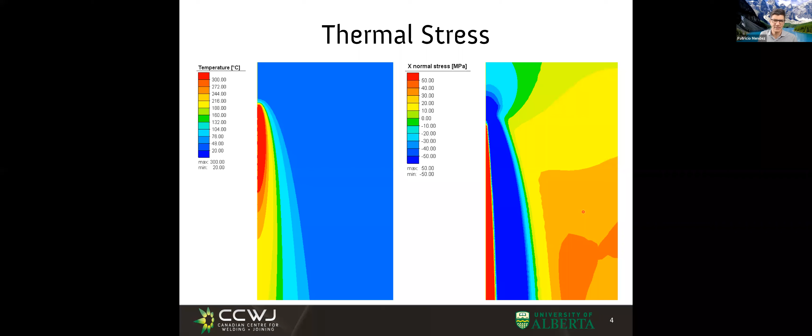So when people talk about welding distortions and welding stresses, we know this: something's getting bent, something's getting out of place. But if we dig a little deeper, we'll see there are many types—people tend to call it shrinkage. It's kind of an odd word because it leads some people to believe shrinkage means shrinkage from solidification, or thermal shrinkage, forgetting that before the thermal shrinkage, there was a thermal expansion when things heated up. But whatever it is, I'm going to use this word shrinkage here for now—we have many types.

Along the axis of the weld, we have longitudinal shrinkage. Across the axis of the weld, we have transverse shrinkage. In addition, if I weld the plates, they tend to be distorted—if I weld two flat plates, typically they don't end up flat. And I showed you some images when we discussed the concept of joining, about how things like electron beam welding could give low distortion in thick sections, but TIG could end up with big angular distortions in thick sections. And then here we have bending shrinkage.

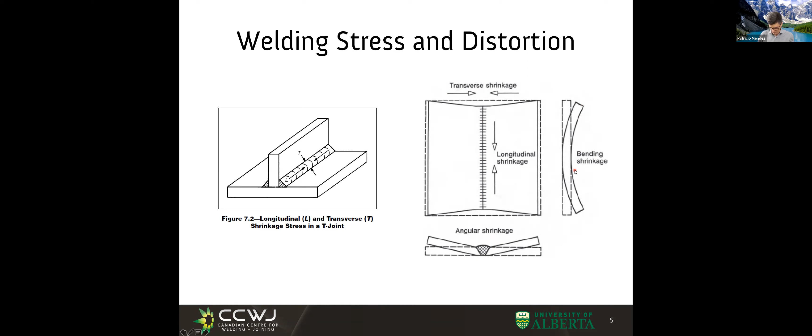So about transverse shrinkage, using words: there is something interesting, as the plate gets locally hot, it expands, and then when it cools down, it shrinks. So if I have no restraints, the plate is going to move out and in as it needs, and we might end up with higher distortions.

On the other hand, we can clamp really well. If you look at the Lincoln Procedure Handbook, it has a whole subsection just on clamping. You clamp it really well, so when it wants to expand or contract, it can't. Good news is it's not going to be too distorted. Bad news is it's going to have a whole lot of stresses accumulated, right? So that's about transverse shrinkage.

About angular shrinkage, we have a very similar effect, and that's one of the reasons we clamp things really tightly. But it's never perfect, never perfect. And multi-pass welds bring even more complexity - in this class we'll be talking about single pass welds. For example, when I make my root pass, now things cannot compress anymore along that line.

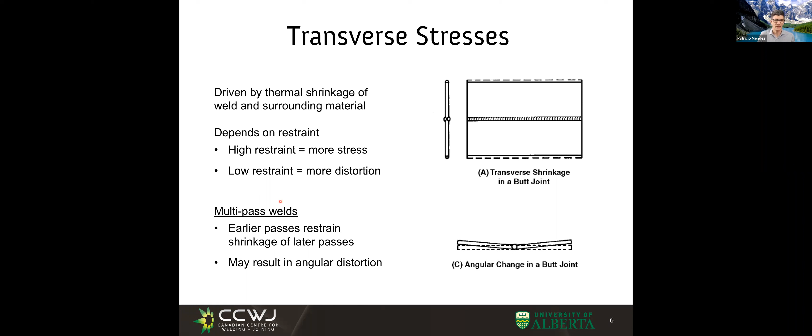All these are words. We're working on turning those into predictive methodologies for engineering - not quite there yet, and nobody's quite there yet, but we will be. About angular distortion, there are some things that are interesting. Let's compare two welds, one with a V groove and one with a double V groove. As you can imagine, the double V groove is going to end up with less distortion because it's a symmetric joint to start with. Whatever distortion the V does is now compensated on both sides.

A really good question would be: if both V's are the same, why don't I end up with zero distortion then, right? Well, I'll give you an answer in words - we're working on doing this more rigorously, but this is what happens. Let's say I weld it and I flip it, and this part is welded, and it would have a distortion comparable with what is to be expected from a single V.

Now I'm going to do my new weld, but guess what? I'm doing it in a starting condition that is already different than before, and in addition, there might even be some residual stresses involved in some cases. So it's never exactly the same. It's not the same to start with a 60-degree V as if I did the weld on the backside before - chances are that this opening is bigger than 60 degrees. Very interesting. So that's comparing a single V with a double V.

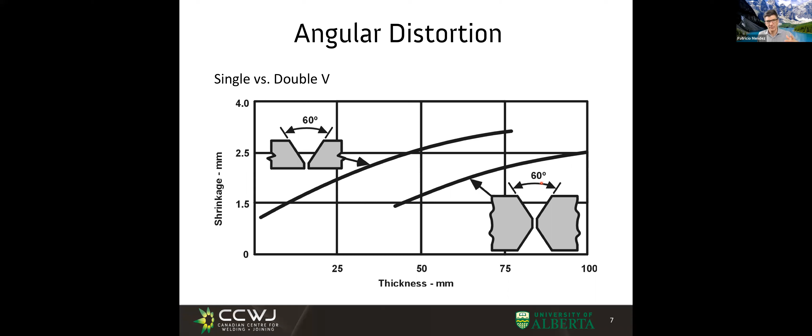Now let's compare with the opening of the V. And guess what? Something not too difficult to imagine: as the V is more and more open, the angular distortion is higher and higher. This vertical axis measures how many millimeters one of the sides lifted for a particular case. I'm not worried about exact numbers, just the trends. The trend is that big open V's have a lot more distortion than narrower V's, and I could reduce it even more by having a double V joint preparation.

When we discussed keyhole electron beam welding or keyhole laser beam welding, that keyhole that goes very deep is essentially like having a very, very narrow joint preparation, like closing this to much less than 60 degrees. If I close that to close to 0 degrees, then I end up with something that has close to zero distortion.

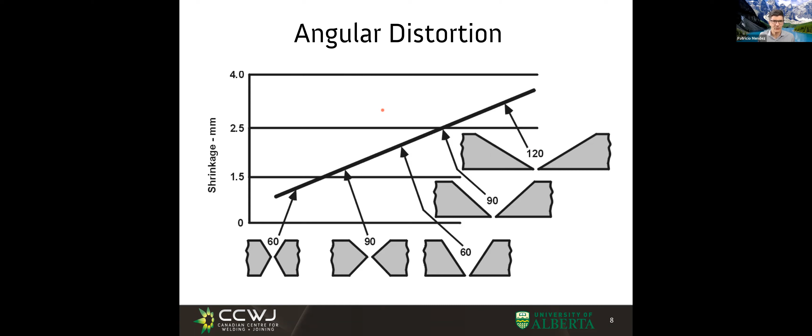If you look at old exams, this is a question I asked in those, pretty much as it is here. They're all uploaded. So let's talk about longitudinal stresses, and longitudinal stresses is where we're gonna get quantitative.

We're gonna see how the area near the weld expands and then shrinks, and when it shrinks ends up with very high tensile stresses. If we weld this plate along this horizontal axis, this is a typical distribution of residual stresses from a book: right near the weld is going to be very high tensile stresses, and outside the weld we're going to have the compressive stresses that balance out the tensile stresses.

Something I want to bring to your attention: until not too long ago, I myself used to think that the part that ended up in tension was just the molten weld bead. Let me dispel that. The weld bead plays close to no role. Whether the weld bead is bigger or smaller, you would have distortions even if you don't melt anything. We're gonna see what matters for real.

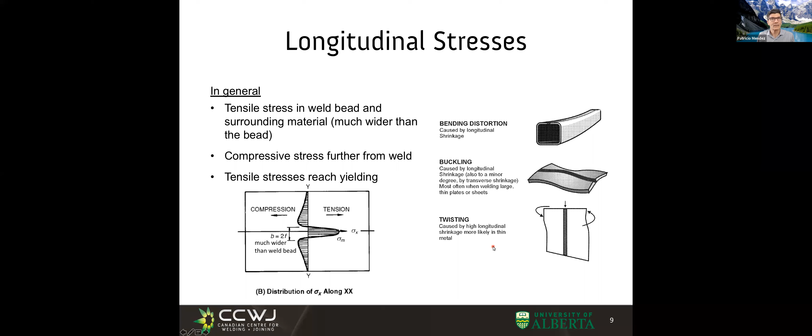So to think about residual stresses and the associated distortions, I'm going to use what is a standard way of looking at the problem that is called the 3-bar model. The 3-bar model is a lie. And typically, I tell you lies and I say, well, but it's a pretty good lie. This is a so-so lie. So I'm going to use the 3-bar model to discuss with you what matters. And then I'm going to tell you where it falls short, and we're going to do it right.

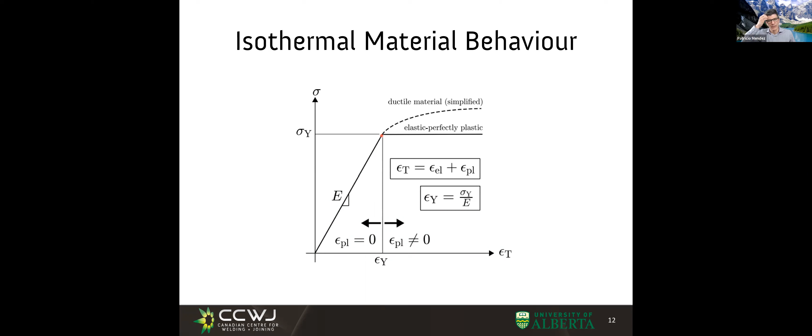So let's go back to the residual stress. Three-bar model: on the sides, the two bars, number 1 and bar number 3, are always at preheat temperature - let's call it room temperature. Bar number 2 in the middle goes hot and then cools down. The material we're going to consider is elastic, perfectly plastic. As we stretch it to a point, the atoms stretch along a line, but then when we let go, it goes back together. And if we stretch it too much, it starts yielding.

In this model, before we apply the load, before the middle bar sees temperature, everything is the same. When the bar starts seeing some temperature, it's going to want to stretch. This stretch is not possible in this case because of the crossbars. In the case of a weld, it's not possible because it's the same plate and all the rest of the plate is cold. So the center cannot stretch - it's all tied together. So the middle material near the bead wants to stretch, but it cannot.

It would be like if it wants to be bigger at no load, but in reality it's the same size, so it gets compressed, and depending on how much it wanted to expand, it can reach yield stress. It doesn't get much more than yield stress. But as it wants to expand more and more, with the same yield stress, it starts having more and more plastic deformation. So here are the curves I was asked about.

At the beginning, the middle bar wants to stretch thermally, and if it stretches only a little bit, it stretches elastically. It gets to a point in which it reaches the elastic limit - the horizontal axis here is the total strain. If it stretches any more, then we start having plastic strain, motion of dislocations. So red is the bar wanting to expand elastically but cannot, so it starts accumulating loads, or elastic strain, in compression. When it reaches the limit, it starts to accumulate plastic strain, and it can keep stretching.

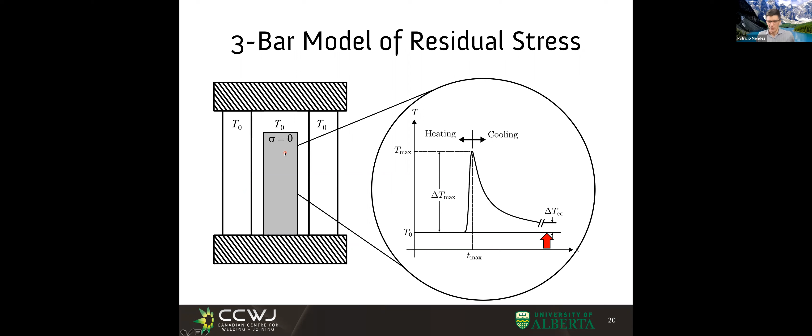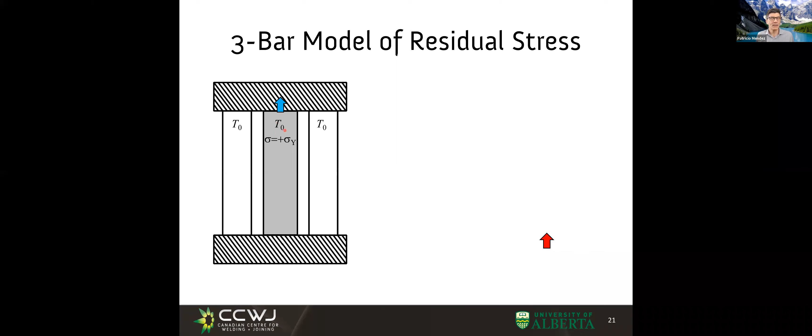After it reaches the peak temperature, it cools down and wants to shrink. If it could, it would get shorter, but it cannot, because it's all attached to the part near the weld - attached to the rest of the plate. So to make it be the same size, we would need to stretch it, and depending on how much we stretch it, it can reach yield again.

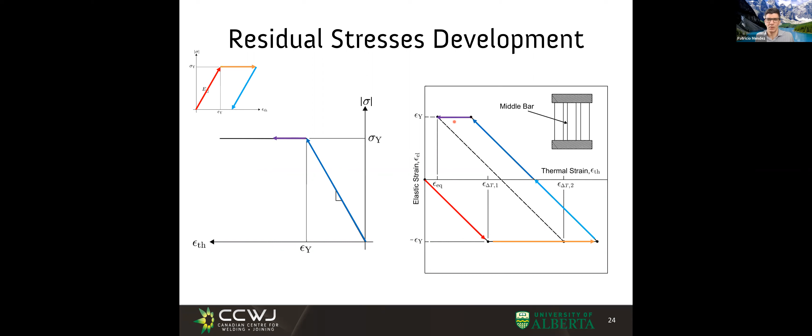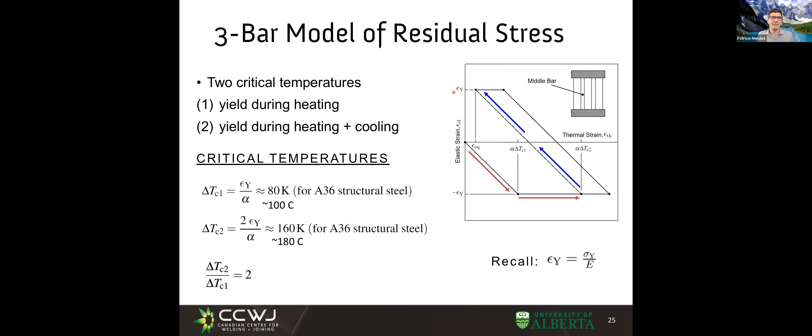What I wanted to bring up is there are two important temperatures. One is during heating, the temperature at which it starts yielding in heating, which we call delta T C1, and this is more or less 100 degrees. So when you're welding, at 100 degrees the material starts to yield. Then there is another one: if you put enough plastic strain during heating, when it cools down, it will eventually reach yielding too. The temperature at which we start having yielding during cooling we call delta T C2, and that is on the order of 180 degrees C. The final stress in this part will be a tensile stress on the order of yield stress.

So in this 3-bar model, what we see is that the amount of plastic strain is related to the total thermal strain, which is related to the thermal expansion coefficient, minus the elastic component. And the elastic component was given by this yield temperature, delta TC1.

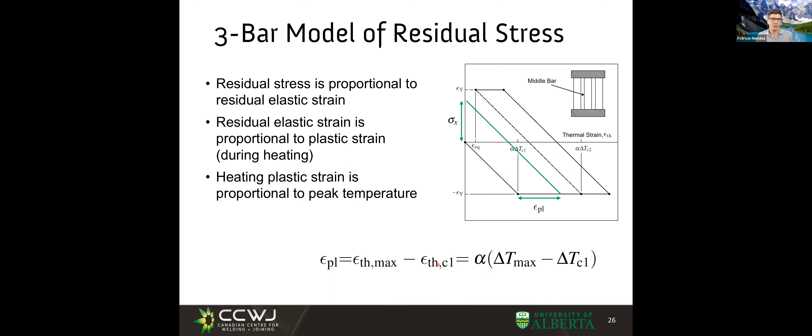So what do we see? We have seen when we started to discuss our module on temperatures how the maximum temperature at each point, the farther away we were from the weld, the lower the maximum temperature was. This is kind of a schematic of each point, showing what is the maximum temperature it would see.

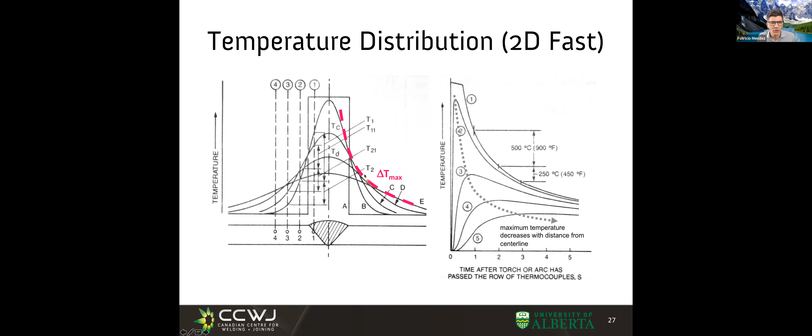Now this maximum temperature, when we multiply it by the thermal expansion coefficient, gives us the total strain. And we said that any strain above this, the strain given by the yield temperature, any temperature above the yield temperature would result in plasticity. And when we reach delta TC2, that is plasticity during cooling, we know we're going to end up with a final residual stress that is yield stress.

So our final state of stress is going to look like this one here. This amount is the residual stresses in tension due to the plasticity. This is where it had plasticity both ways. This is yield stress. This part is when it sees plasticity during heating, but not during cooling.

And these other parts here, these kind of wings, are in compression to make up for the tension near the weld. I want to be clear, this width here is not the width of the weld bead. This width is the width of the isotherm of 100 degrees. The width of the weld bead is the isotherm of 1500 degrees. This one is the isotherm of 100 degrees. This is much, much bigger.

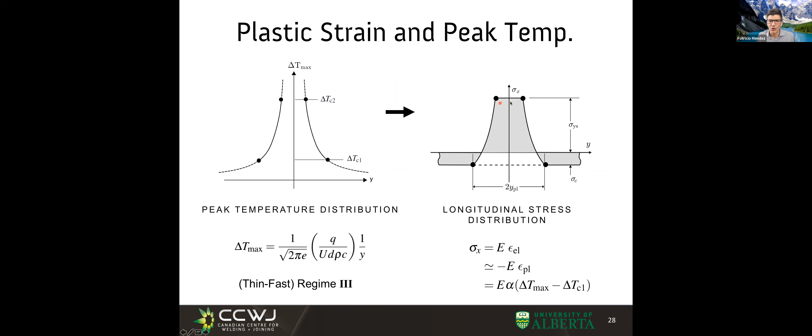This compressed part in a big plate is negligible, so we can forget about this part now, because it's just the part in compression. This load here, this area, here we have tension, here we have compression. If we look only at this area and integrate it, that is what is called the tendon force. If we integrate this area, it gives us how much force the weld is pulling.

So because of heating and then cooling, we have residual stresses, and the residual stresses are much broader than the weld bead. The residual stresses reach down to 100 degrees C in structural steel, while the bead reaches only up to something more or less 1500 C. So this is much broader. If I integrate all these residual stresses in this broad region, that integration of residual stresses over the cross-section that had plasticity is what is called the tendon force. It's because it's a tendon, like those in the Achilles tendon.

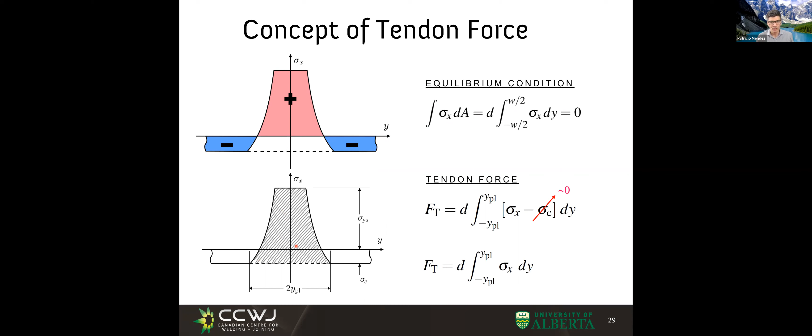And that tendon force is what is pulling the weld and what is causing distortions, buckling, twisting. So I'm not going to ask you in the exam to do the derivation, but I want you to know these basic things: that welding during heating gets into plasticity, during cooling gets into plasticity again, and this area in plasticity is much bigger than the weld bead.

And it's your great fortune that we have at the lab done, Mitch, our PhD student, done so much work in trying to predict this. And we have formulas for that. And this is a formula for the tendon force. It's very similar to the formulas that you saw in the temperature-related properties, like thickness of the heat-affected zone.

It says the tendon force is square root of 2 over pi e, that's a number, log of delta TC2 over delta TC1. You might or might not remember, but this ratio, for what we will be using in the class, is 2. There are cases in which it's different than 2, not too far from 2, but more or less 2, not exactly 2. I'm not going to worry about those right now.

So up to this point, we have just a number, if we say this is 2. Now here E is the Young's modulus, alpha in this case is the linear coefficient of thermal expansion, which is tabulated. Rho is the density of the material. C is the thermal capacity of the material, the specific heat of the material. And this is Q in watts, effective, because all that matters is what comes in, divided by the travel speed. This term here is the actual heat input in joules per meter, or kilojoules per centimeter.

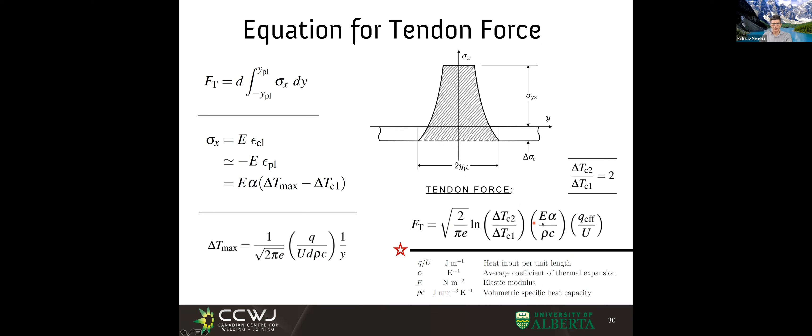This formula, which we already knew, we can combine with these concepts we have, but I'm not going to ask you about the derivation. I want you to be able to use this formula here.

If we say, imagine we have a plate, not a girder. Now let's talk about the compressive stresses. The compressive stresses are going to be the tendon force divided by the thickness and width of the plate, or the final membrane, right? The two plates together.

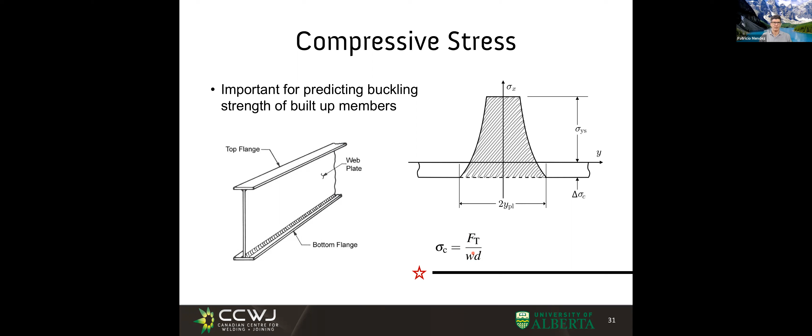And this is effective heat, this is heat input, right? We wrote it as power over velocity, but this is heat input. Look at this. This coefficient would be 0.22 for structural steel, 0.25 for stainless, 0.2 for 4340, right? It's pretty much very much the same along materials, that if you go from Inconel to aluminum, very different, right? And their coefficients are more or less the same.

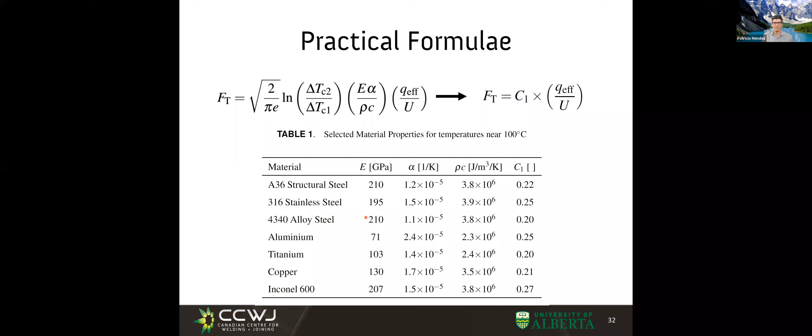So let's do an example, and then I don't know if I'll have time for you to do it during the class, but during the seminar we'll do another example. I would like to do a few examples in preparation for the quiz.

So this is a sub-arc welding procedure, right? And the question is, if we are doing 10 gauge sheets, these ones here, with this procedure, what is the tendon force going to be? Well, look, after all I talked, I hope you got some sort of an intuitive sense, hopefully. But in the worst of all cases, here you have the formula.

The tendon force is C1 times the heat input. And here we have the thermal efficiency of subarc welding, 0.99, the voltage that they tell us, 28, the current that they give us, 675, and we get how many watts. This is the q eff here. The U is the travel speed, and in this case we have it, they call it arc speed, but it's a travel speed, 120 inches per minute. So we'll need to do the conversion, and we multiply by C1.

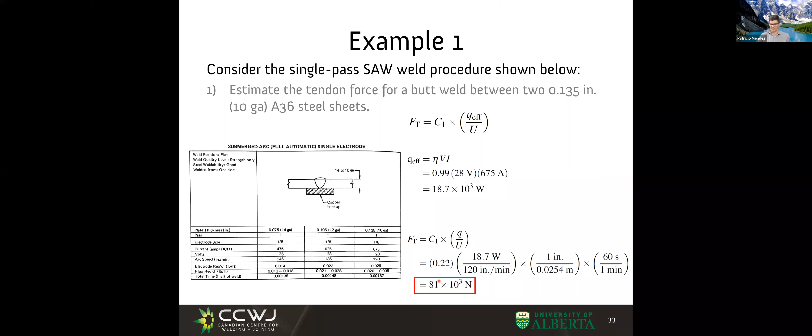So now all these tensile stresses in the weld, and it's not just the weld bead, right? It's wider than that.

This will induce a compressive stress in the rest of the plate. Now let's say the plate is not very wide, right? It's 10 inches wide on each side. Each of the plates is 10 inches wide, 250 millimeters.

So what would be the compressive stress in this case? We use the same calculation we discussed before, using the concept of weld as a line. We say this tendon force is just a force in a line, divided by the cross-section of the plate. The thickness was 3.4 millimeters. If we do the conversion, the width is 500 millimeters total, and that gives us about 50 megapascals.

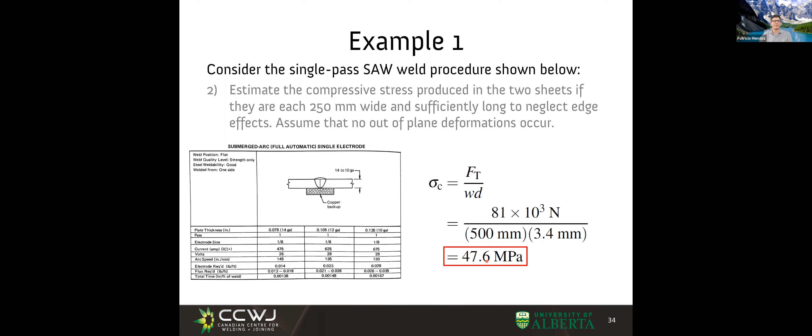So 50 megapascals is kind of an okay load, but it's not negligible. Now, if the plates, instead of being 10 inches wide, were like 10 feet wide, as many things in civil engineering, then this compressive load would be really negligible. That's why for this class, we're assuming that the effects of a compressive load in modifying our calculations are very small, and we calculate the compressive load as if it's decoupled from the tendon force.

More bending distortion. Again, for the mechs here, we'll say, oh, this is trivial. For some others, oh my God, what are all these formulas? These formulas are included here, so if you ever need them, you have them, but they're typically in engineering handbooks. But this is the point.

If you do the weld, making a hollow steel section, as I showed you as an example at the very beginning of class today, and you weld it at the edge, that weld is off center. And now you know that this weld is going to have this tendon force pulling. These formulas tell you how much a beam is going to bend for a given load you put on it. In our case, the loading is the loading of a moment, and the moment is the tendon force times the distance to the neutral axis.

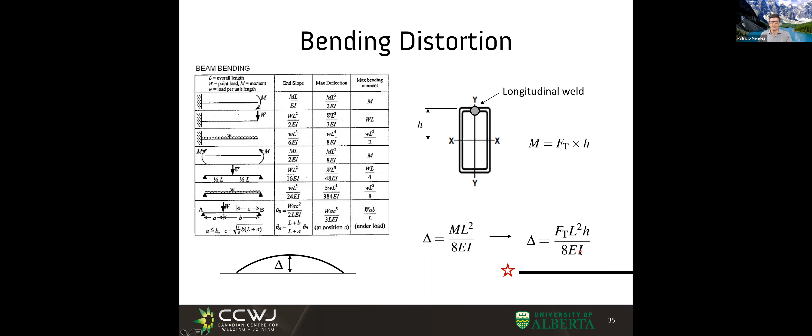So you don't need to do the derivation, but this is the formula that would give you, for a beam like this, what is the deformation when it bends. If you put it on the floor and measure how much light is there, that's given by this formula with the tendon force, length of the beam, distance to the neutral axis, the Young's modulus, and I, the moment of inertia, which is tabulated. So let's do an example.

Let's calculate the deflection of a 1 meter long hollow steel section, 8 inches by 2 inches by 1/8 inch thickness, fabricated in a single pass with a single MIG pass on top. By the way, when we did this problem, we used the values from the procedure handbook to suggest something reasonable. And here we have the values.

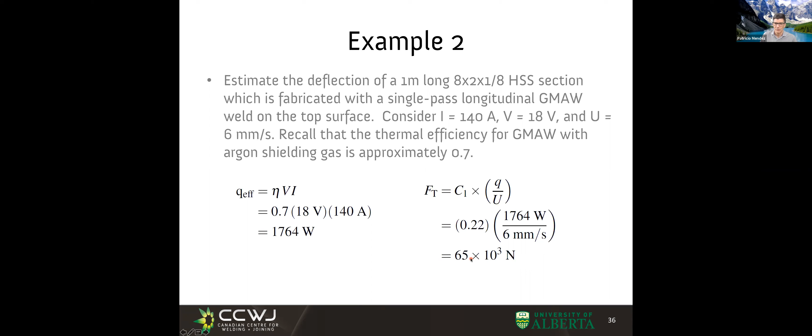So we would calculate - we need to know, to use this formula, we need to calculate the tendon load. The tendon force, if it was structural steel, is like C1 is 0.22 times the heat input. The power is thermal efficiency times voltage times current, which were given, and the travel speed is given. In this case, we get that the tendon force is 65 kilonewtons, which again is a lot - that's more or less 6 tons.

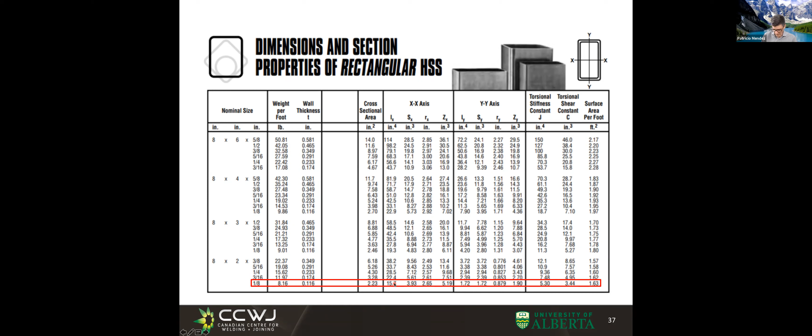Now, to apply the formula, we needed the moment of inertia, which is typically tabulated - that's one of the beautiful things of civil and mechanical engineering, they have these things already done. The hollow steel section of 8 by 2 by 1/8 will have a moment of inertia of 15.7. We convert this to 6.53, and it appears here: Young's modulus, moment of inertia, the tendon force we calculated, length of the beam, and distance to the neutral axis. And it says this beam is going to bend a little bit more than 0.5 millimeters, about 0.6 millimeters.

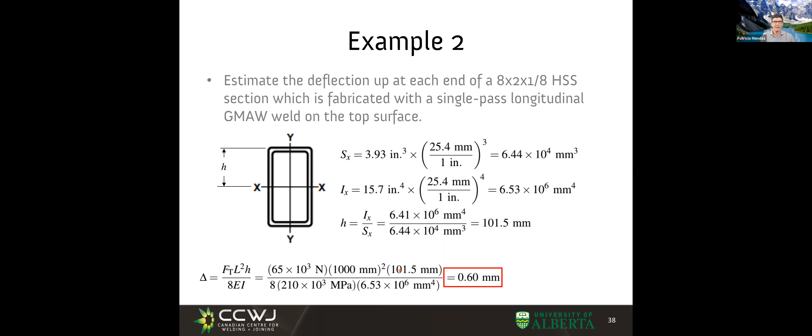This calculation we have just made is extremely powerful. We can calculate bending of things during welding. Let me put all this together, because now things get to a really incredible point.

We said that this deformation in the bending of a beam can be calculated with this formula that mixes strength of materials with the tendon force. And the tendon force came from our understanding of temperatures and the yield stress of the material, right? So this formula we just discussed was the topic of today, and we could calculate the tendon force. And we also said something that is especially interesting.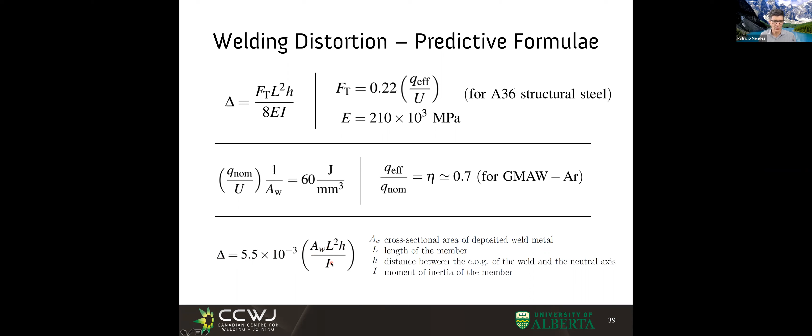And here you have formulas from the Lincoln Procedure Handbook. And look at that - the formula of the Lincoln Procedure Handbook is pretty much exactly what we have done from first principles. But you know how they did it? They knew strength of materials, and they assumed that there was a force proportional to the cross-sectional area of the weld.

They didn't know why, and nobody knows how they derived these formulas. What I suspect - the book doesn't say, none of the books say - I asked Professor Duane Miller, who is Dr. Blodgett's successor, do you know where this comes from? He says, I don't, and there is no records of it. What I suspect is they measured a lot of bars bending, and they came up with this coefficient empirically. But now you know where it comes from. And they never did it for aluminum.

But we don't need to, because we can do it. And if you want to calculate bending in titanium, now we can. This is the amazing thing of having broad understanding - the amazing thing of the patience you have had to learn a dictionary, learn metallurgy, learn plasma physics, learn heat transfer, learn stresses and strains. But when you put it all together, all of a sudden, now we can make very practical predictions, knowing where it comes from. And in addition, we can make predictions for things that nobody else could make, because there is no such thing for aluminum.

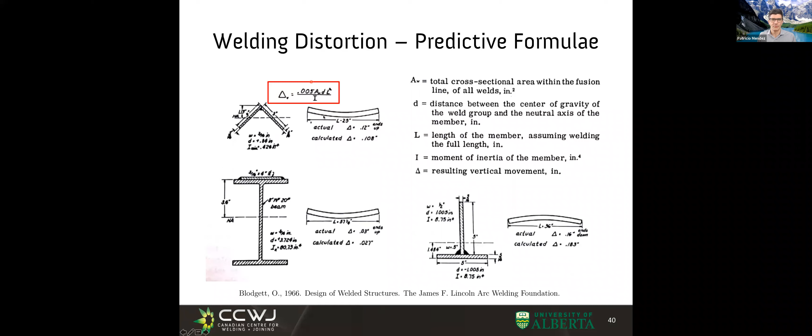One last thing that I wanted to show you. In these calculations, I want to show you the effect of the plate length. When we use the concept of weld as a line, we assume that the line is narrow and long. But imagine the plates - it is a square plate in which the weld wouldn't be so long, right? The plate is too short to consider that the line is long. And what we see is this tendon force in these edges - it causes some amount of strain.